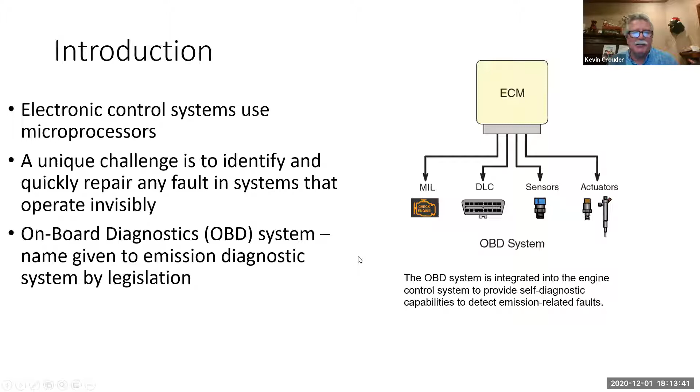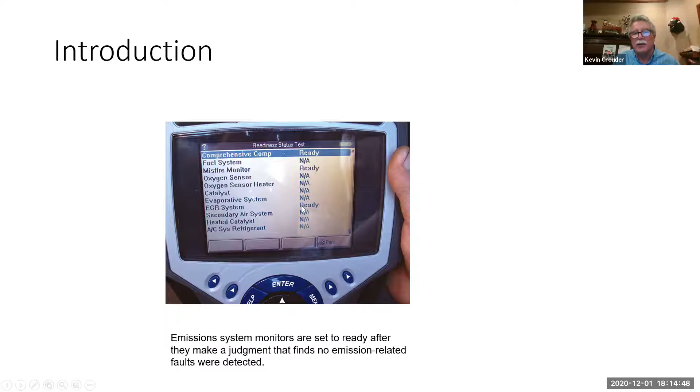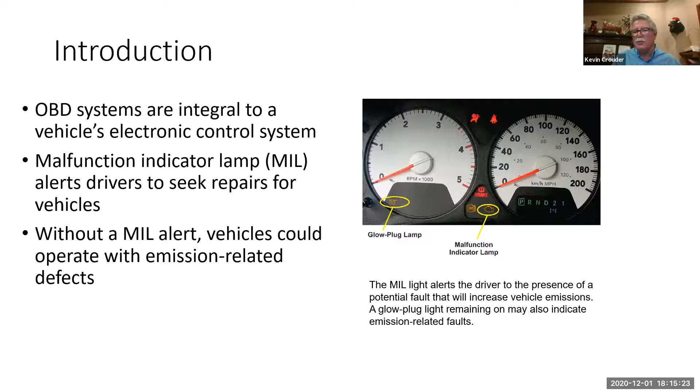So the OBD2 system also is going to do other things. It's going to turn on the MIL light, which is a malfunction indicator light, also known as the check engine light. It could turn on the glow plug light. We'll have wrench lights that come on, a little shape of a wrench, if it's throttle controls or something like that. It's also responsible for turning on and giving us failures for idle only or reduced power, and those kinds of things, depending on, and most of those are going to be related to your after treatment systems.

How these systems work, how all the coding systems are going to work: you're driving down the road, and a sensor is out of tolerance somewhere along the line. The first time it's found, it's going to set what they call a pending code. It'll be secret to the driver, the driver will not know it's happening, and he may notice the car running different or may not. Then the second time he goes out and drives the car, on the very next drive cycle, if it happens again, it'll set that as a continuous code in the computer. It's going to set a check engine light, so the operator knows he has a problem. But if he continues to drive it and has 3 consecutive drive cycles and it doesn't happen again, it'll turn the check engine light off, but the code will stay in the computer. But if he continues to drive it and it never has another failure again, after about 40 drive cycles, the code will be erased from the computer. So that's not all completely in concrete.

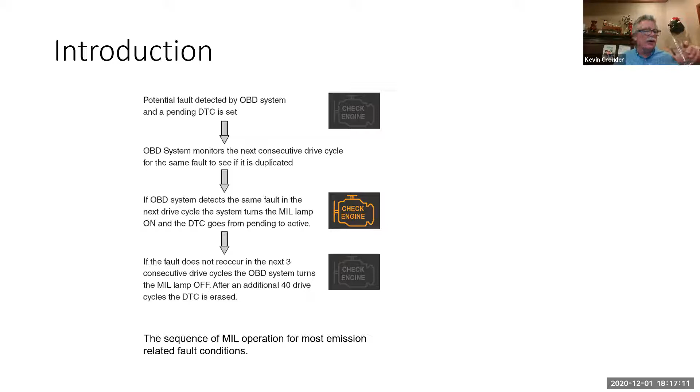That series of events, there's different codes that are failures that maybe a type A, that's really important, and the first occurrence may turn the check engine light on. So there's variations to that, but that's generally what takes place in a computer when we're going to have some kind of a failure. So, and I kind of alluded to this, well, maybe I didn't.

So there's 2 approaches that you're going to make anytime you're going to diagnose any car today. You've got a symptom-based approach, or you're going to go an OBD2 based approach.

A symptom-based approach is going to be, go back to the example of the fuel injector. If you had a simple car that the injector wasn't working and it had a misfire, and you went after this car, didn't go into the computer system, or you went back to an old carbureted vehicle or something like that.

And just a point of reference, 2 days ago, I had to work on a 1986 6.9 liter diesel I haven't seen in 20 years. It's like, oh my gosh, no computer on it, no nothing. I had to go back and diagnose by symptom.

The car ran rough. I had to go and diagnose by the symptom. The symptom was X, it ran rough. What are the things that are going to cause it to run rough? You have to diagnose it based on a symptom and use that kind of strategy to go to it.

Well, the OBD system is a system in which it's going to set codes in the computer and stuff like that. And we are going to read those codes and we're going to diagnose them through a series of pinpoint tests to find the root cause of the problem.

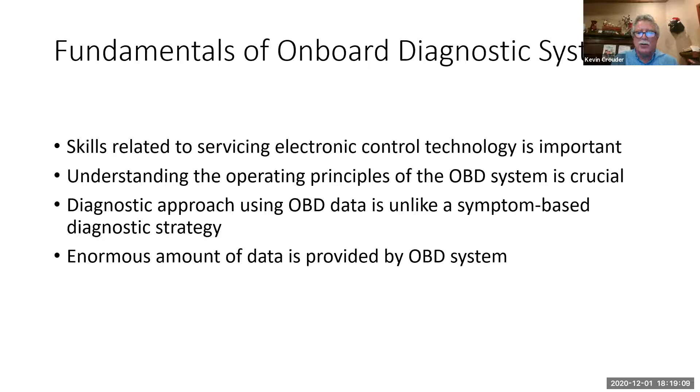I could talk about it all day long, but until you actually experience it, it won't make a lot of sense to you. And here's the kind of that...

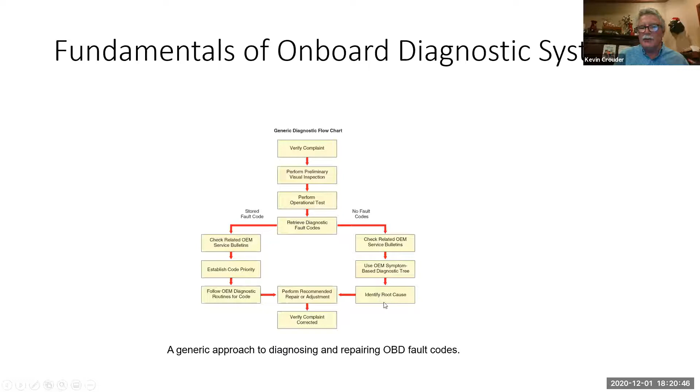So some of the things that the OBD2 system affords us, and there's lots of things that we're going to go through a lot of them, but they give us a lot of real-time data. Whether it's watching PIDs, watching the data that's come across, and we did that a couple of times this semester already.

And then looking at the readiness codes and stuff like that. All this data, we can take freeze frame data, and by having all that real time data, we can then make decisions about what it's going to take to repair these cars.

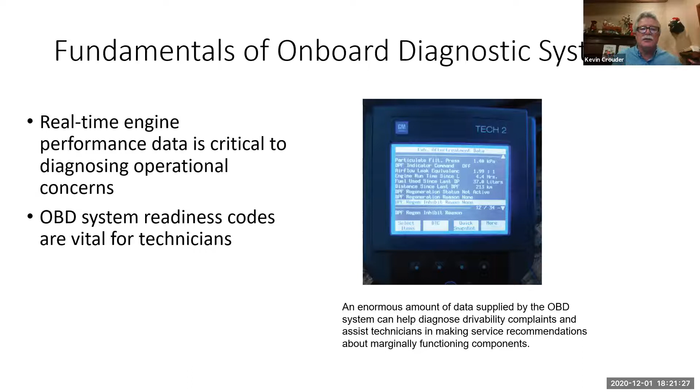And I'm sorry that this has a GM label on it. So after we're done fixing them, we're going to erase the fault codes. We can get it all cleared out, and we're going to go through a drive cycle, which we'll talk about here in a little while, to verify that the repair was successful.

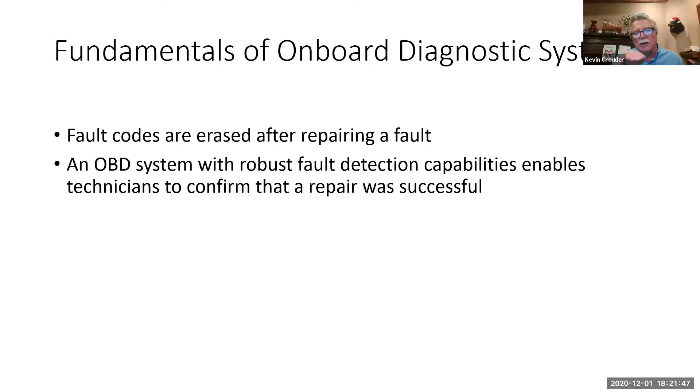Okay, so let's take a step back and talk about the OBD2 requirements for diesel engines. This is the legislation that's put out, and it's not complete, but this is some of the legislation that's put out to say, okay, what is the requirements that diesel engines have to have, whether it's a Chevy, a Ford, a Dodge, a Mercedes, whatever it is.

And gas engines have their list as well, but they must have a malfunction indicator lamp in the driver's view.

If we went back to the early days, back in the early 80s, Ford and Chevy both had computer systems. Chevys turned their check engine light on and they stayed on. If they had a problem, the light stayed on. Ford was a little smarter in the beginning. If the problem was there, the light came on. If the problem was gone, the light went out. It may have stored the code, but the light didn't stay on. Well, they got away with a lot of not having to make a lot of warranty repairs because the light went out, and it wasn't as big a deal as a customer with the light all the way on.

Well, the government figured that out in a hurry and said, no, if there's a problem, it's going to set a code, you're going to turn the check engine light on and leave it on. So it's important that part of the system is that the driver or the operator knows that a check engine light is on, that he has a problem.

There has to be a standardized 16-pin diagnostic connector within the driver's area. Sometimes they're a little out of the driver's area, but they have to be within a certain area of the driver. Not that the driver does anything with it, but it's just so that if you're an independent shop, no matter what manufacturer is going to roll into your store, you can know basically somewhere around the driver's foot area, there's going to be a connector that you can plug into and test, and you don't have to go searching for it. There's standardization of a series of diagnostic fault codes across all manufacturers.

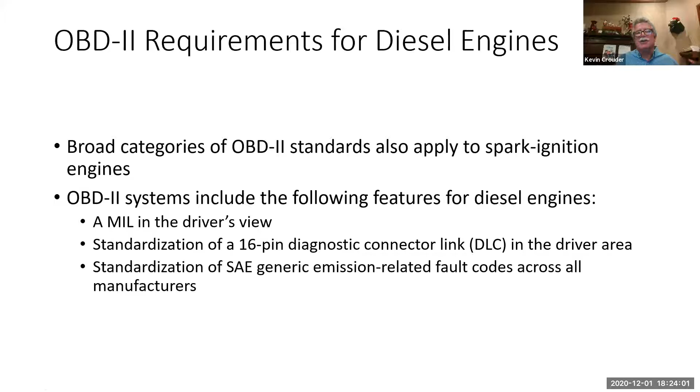We'll cover that here in just a minute. Standardized network communications. In other words, the network talking to the scan tools is all going to be standardized so that you don't have to have 10 different scan tools to talk to 10 different cars. You can buy a Snap-on Solus, or there's some other aftermarket ones you can plug in and talk and get all this data that I can get out of my Ford program off of any vehicle. Now, my Ford program only works on Fords. I can't go to someplace else, but the independent stuff or the generic stuff will work on everything.

They have to be able to display freeze frame data for fault codes, and we'll talk about what freeze frame data is here in a minute.

This is a biggie: standardization of names and abbreviations of components in a system. In the early days, engine coolant temperature sensors were called... what did we used to call them? It's old. Well, anyway, Ford had a name, Chevy had a name, everybody had a name. So nobody knew - you had to guess what somebody was talking about when they said a name, because they were never really simple. But the legislation came out and said engine coolant temperature sensor is going to be an engine coolant temperature sensor no matter who's making it.

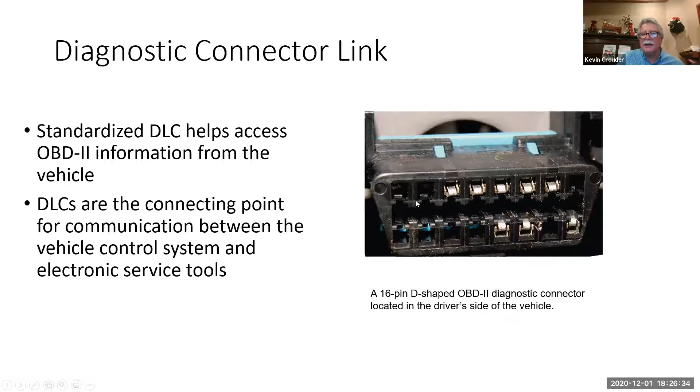So this is the diagnostic data link connector. If you look under the dash of any car built since 1996, and we even introduced it in 1994 on the Mustang, every one of them are going to have this exact same connector in there, and the pin placement on these is going to be the same.

This pin 16 is going to be your power, and I believe the ground - where is the ground? Ground is 5, somewhere up in here. Signal ground, and then 4 is chassis ground. So these are going to be your grounds, and then 6 and 14 are your CAN network, and 11 and 3 are, I think, a low speed CAN.

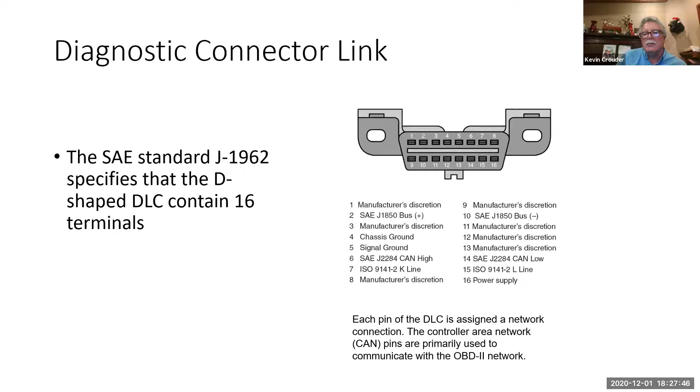Some of the stuff changes through the years, depending on if it's a CAN network or some of the early networks. But at the end of the day, these things all have to be standardized. Now there's some pins that are open that are not standardized by the government, and the manufacturers can put some different signals there. Pins 11, 12, 13, and 8, 3 and 1 are at the manufacturer's discretion. So they leave those so we can put different CAN networks inside those, so we can test them with our scan tool. But this is the connector of choice that you will find under every dashboard.

Some of the early stuff used to have a vehicle speed sensor for the transmission control module, a vehicle speed sensor for the engine module, and so wiring all over the car. Or you had a vehicle speed sensor and it had wires that ran to everything, so you had wires everywhere, miles and miles of wires. Well, that is inefficient, it's heavy, and what we can do is we have this network in here.

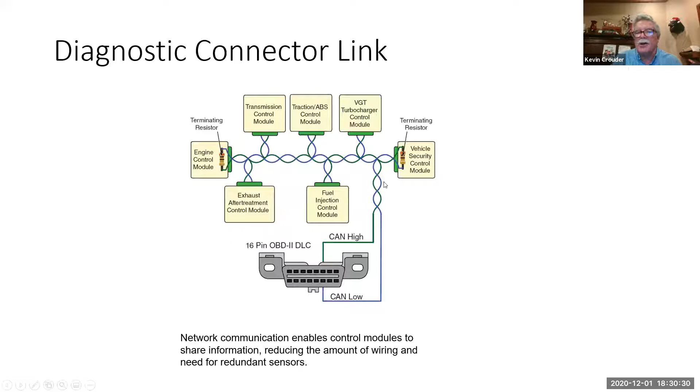And there's lots of them. I mean, some of our hybrids are running 14 or more modules on them, and they're all talking to each other, but they're not all talking on the same network. So you're going to have, say, this particular one is going to be on this network and this network over here. And all these modules might need to share information across network lines, so that we have these what we call a gateway module.

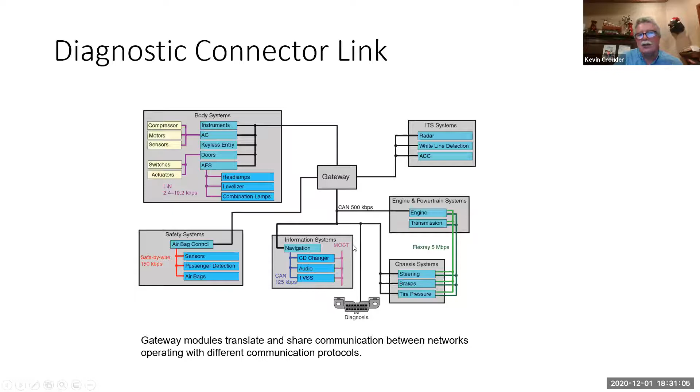So this thing sits in here, and all these modules sharing this information, it can go through the gateway and then share it to another network. So there's all kinds of different networks all over the car, and they're all talking to each other. And that's what all that data link stuff is.

So the new stuff that's out there is called CAN networks, which is controller area network. It's not actually all that new - it's probably darn close to 20 years old now, I guess. But it's the newest stuff, and there's even some faster stuff out there because we have CAN 1, 2, and 3, and lots of different CAN networks out there. But the CAN networks, they're just high speed. There's high speed, medium speed, and low speed CAN networks.

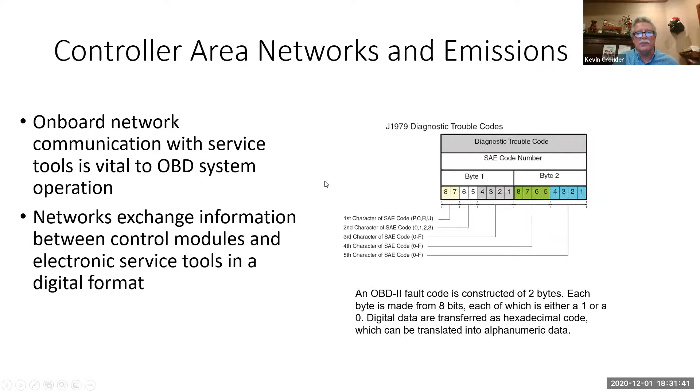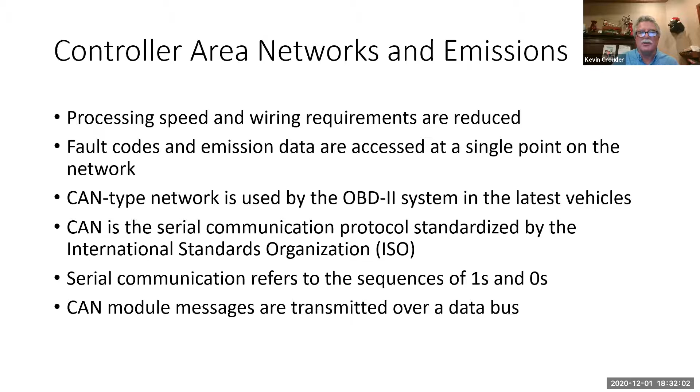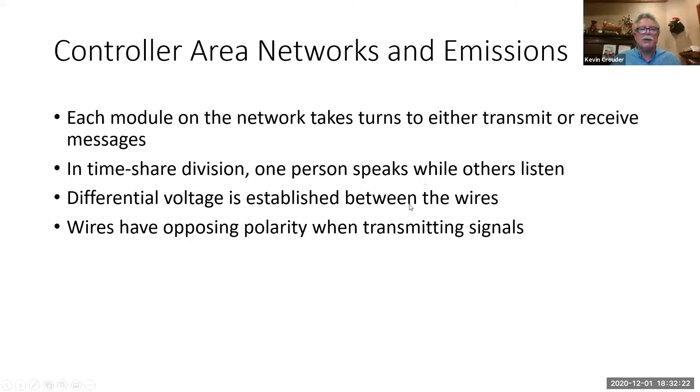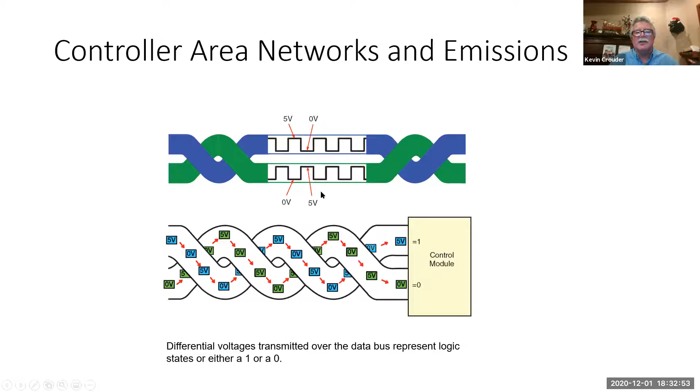Okay, so not all modules are going to be a twisted pair. There's some networks that are just a single wire, but mostly all the CAN networks and all the important stuff is a twisted pair of wires, with one low and one high, and it's going to be alternating. When one's high, one's low. When one's low, one's high. So you're just going to have this alternating voltage back and forth, and you can see this in an oscilloscope.

Okay, and if we're watching a CAN network, we're just tied into that on an oscilloscope. This is what it looks like: a high and a low, and a high and a low. We're not going to get into network diagnostics here, but I want you to know that it's there.

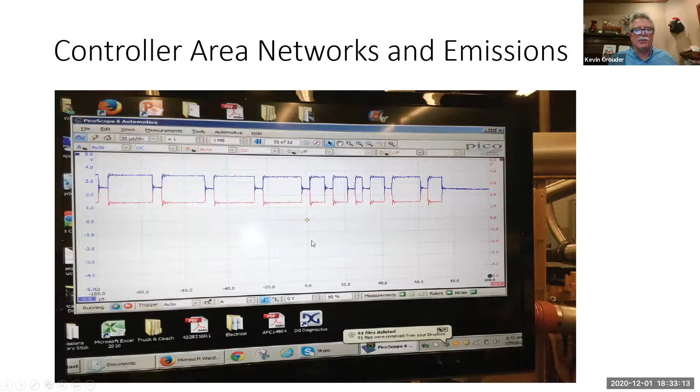Okay, so we're going to shift gears and talk about fault codes. Fault codes are used to bring us down, hopefully, to the closest possible point of the failure. Now, some fault codes are very generic and are only informational. Lots of informational codes out there that just drive you crazy. But most of the codes are trying to get you down to, hey, the problem lies here, go find it here.

And that's where we have standardized codes that are generic and legislated, and then there's diagnostic fault codes that are manufacturer specific, so the manufacturer has the ability to put a whole bunch of codes out there so we can diagnose our cars right to the point of the problem.

So when we pull codes up, has anybody ever pulled codes on a car? Crystal, have we done any of that last semester? No. Okay. Did we talk about this at all last semester at the gas engine class? Yeah, a little bit. Okay, so...

So codes are going to come up, all OBD codes since 1996, in this format. It's going to be a letter with a digit, 4 digits. The digits can be numbers, and then probably in '03 they started introducing letters within those digits, so it kind of gets murky. But the first digit is going to determine the system it's involved with, whether it's B for body, C for chassis, P for powertrain, which includes transmission, or U for network codes.

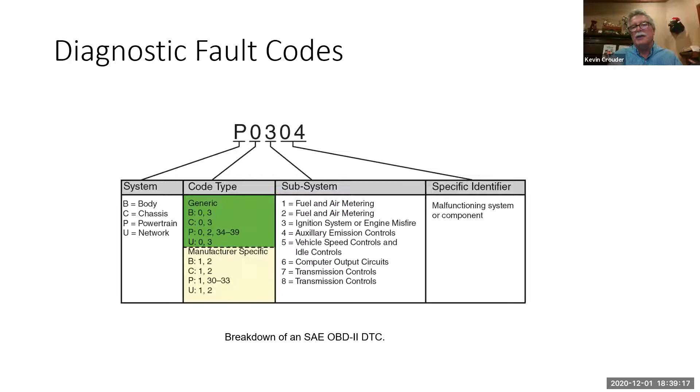But you don't have to memorize this stuff, because once you take the code, you can go into the workshop manual or into the pinpoint test, find the pinpoint test, and it'll walk you right through a series of things to find out what's going on with it.

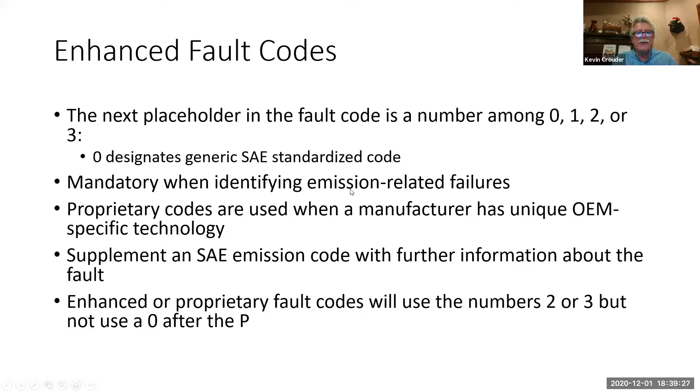So we just covered that. We covered that.

So as we talked about priority codes, we talked about placing priorities on codes. Well, we can do that, but the computer also does the same thing. It sets priorities as well, as far as when it's going to turn a check engine light on and things of that nature. And we'll have type A, B, and C misfires or codes.

A type A misfire or a type A code is a code that says the problem that's happening right now is going to damage a catalytic converter. That's a type A misfire. So if we had raw fuel going into the exhaust on a gas engine because of a misfire - if we have a misfire, we're not burning the gas, so raw gas is going in the tailpipe, it's going to hurt the catalytic converter. That's considered a type A misfire, and that will flash the check engine light and leave the light on first try.

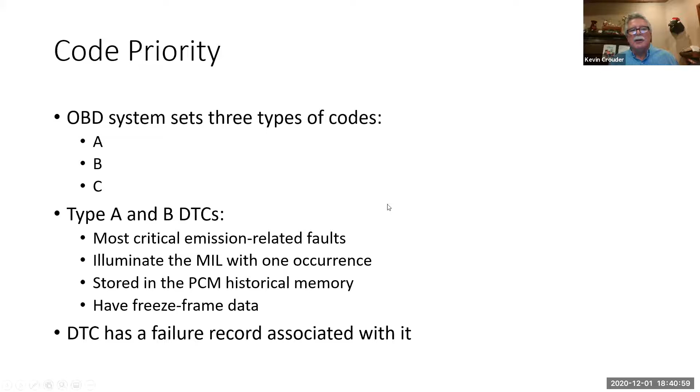It doesn't have to do it on the second cycle. Type Bs are the same thing - they're critical, but not as critical as a type A. And type Cs are not critical at all. Something like intake air temperatures not reading right, or air shutters or something on the shutter controls not working right - something really minor that's not going to cause a bunch of emission problems would be considered type C.

Would an exhaust leak be considered a type C? Well, it would all depend on how it picked up the exhaust leak. The exhaust leak - it's not going to be a code that's going to come and say, hey, you have an exhaust leak.

What you're going to find is a code that says - and now keep in mind this is depending on where the exhaust leak is - but we have problems. You'll have problems on some of these where the cat monitor sits on the backside of the cat, and maybe there's a flange on the back that goes to the exhaust. Well, if that flange leaks right there, as the exhaust comes in, it can swirl fresh air in there. So now all of a sudden that cat monitor's seeing fresh air, and it gives weird sets of codes.

It could see that as, hey, the cat monitor's not working quite right, but it's not a big deal. Or it could see it as, hey, I got air coming through this thing that I shouldn't have, and I've got a potential cat failure. So depending on where that exhaust leak is, your computer's going to pick it up in a performance sense instead of as a circuit fault - it's going to be something's not performing quite right. And based on how it picks it up, it's going to decide whether it's a type B or a type C.

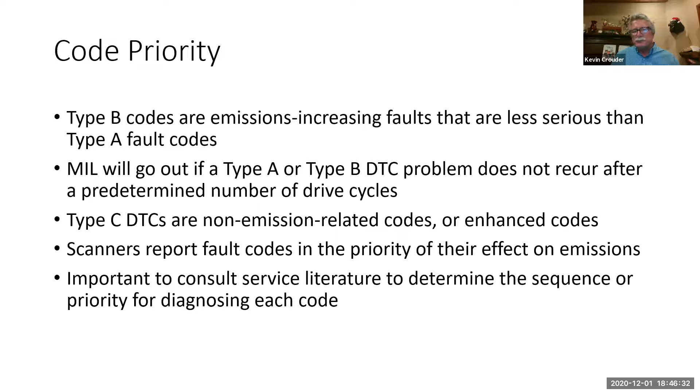All right, so let's talk about what freeze frame data is. Freeze frame data is part of OBD2. Legislation says that the vehicles have to capture data when a fault occurred. So we're driving down the road and a fault happened. Some faults may be a wire went open, or something may be that my NOx sensor went out of spec for more than 15 seconds. Boom, we're going to set freeze frame data when it sets that code.

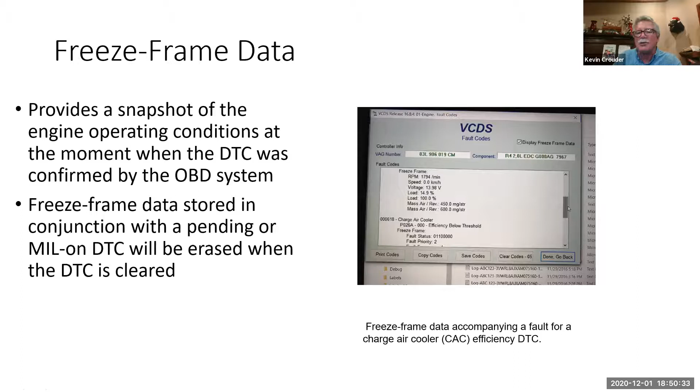That's why we use freeze frame data. Again, freeze frame data is not to capture the data of what was wrong with that part. A couple of rare exceptions might be exhaust temperature sensors -- if you had a big failure on an exhaust temperature sensor, it may show you that sensor was the problem, that it was way out of whack or something like that, but generally not.

So some of the strategies of how OBD2 works: inside the computer, there's going to be a voltage reference set across a signal, and it's actually going to look for a voltage drop across the sensor. It's called comprehensive monitoring, and it's going to monitor all the critical hardwire systems in the car, looking for voltage drops across these sensors.

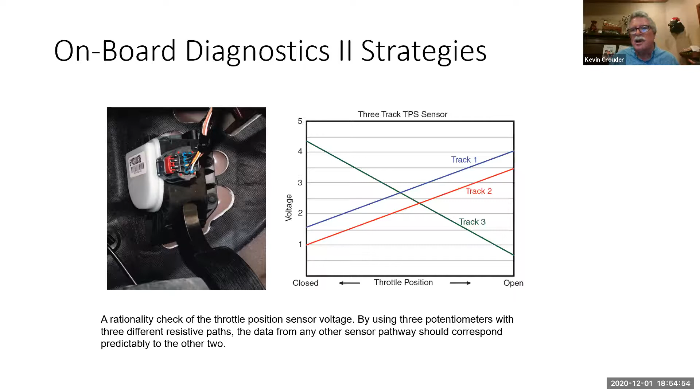Okay, so let's shift gears here and talk about the monitors that are in the system and the readiness status of them.

So there's a series of, like we talked about, up to 14 different monitors in the vehicle. Depending on the monitor, some of them are what we call continuous monitors, they're going to run all the time. The ones checking circuits and stuff like that are going to run constantly. The misfire monitor is going to run as quickly as possible so we can determine whether this thing's got any misfires on it. Others might have to go through a whole rigmarole in order to try to monitor its system.

But what these monitors are here to do is just that, they're monitoring the system to find out how the system is operating. And then it's going to either report a pass, a fail, or a have-not-run-yet. This is part of, if you ever try to get your car smogged and you had a repair or something, they're going to say, hey, your monitors aren't clear, you got to drive the car to get it to clear its monitors.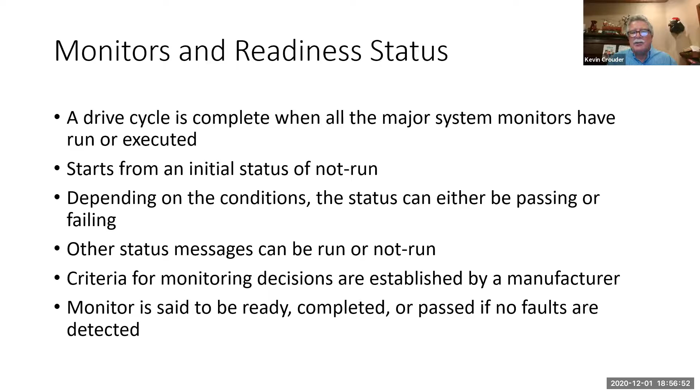It's going to go through a series of tests depending on what test it is. Let me just give you an example. I actually have a slide at the very end with a video that I made today of a monitor check to check the condition of the NOx sensor, to make sure that the rationality of that sensor is correct.

What it does is, you're driving down the road, once per drive cycle, when you come to a stop with the car in gear at an idle, it's going to turn the EGR valve off and watch the NOx levels go up, because remember, when we turn off the EGR valve, the engine's going to create NOx. If we see that rise like it should, then it's going to set the numbers and say, hey, it's good, and that monitor clears. If it shuts the EGR valve off and the NOx reading doesn't go up, it's going to flag it as a bad sensor.

But when we get to that slide, I'll explain a little bit more about what it can be. So we have to look at things kind of logically.

However, all these sensor monitors are going to do different things. Some of them are going to actually turn a valve off and see what happens. Other ones, if all the parameters are set, the things at the right temperature, you're at the right road speed, and everything's perfect, it's going to look at a sensor and say, okay, is everything reading properly? Boom, it's going to work. Different monitors are going to do different things to run themselves.

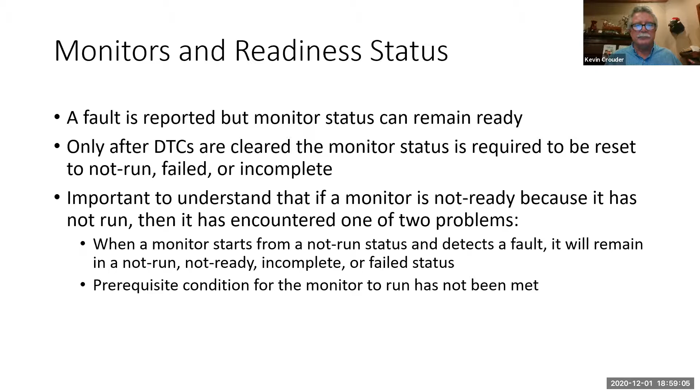And like I said, they're strictly a monitoring system to make sure the car is working properly. So let me make sure I'm covering everything here.

Okay, like I said, there's 14 major systems required by the EPA to diagnose these diesel engines. So we're just going to cover a few of them and what they are going to do.

Fuel system monitor, it's going to evaluate fuel injection pressures, the quantity that's going in. Remember I said if we have a plugged injector and we are making adjustments, and all of a sudden it's like, hey, I'm out of spec on this thing. It's like, okay, multiple fuel event performance.

This week I have a transit in there that actually set a code that says it can't enable the pilot injection. Remember when we were talking about common rail injection, pilot injection was when it would fire an injector before the main injection, so that it would start the flame propagation across the top of the piston, so that when they put the main injection in there, you wouldn't get that cracking noise.

The computer could actually tell me that, hey, I can't enable that system. So it's like, okay, great. But it has a monitor to be able to monitor that. It monitors its timing. It monitors its closed loop feedback controls. Okay, so that's what it's doing with the fuel system.

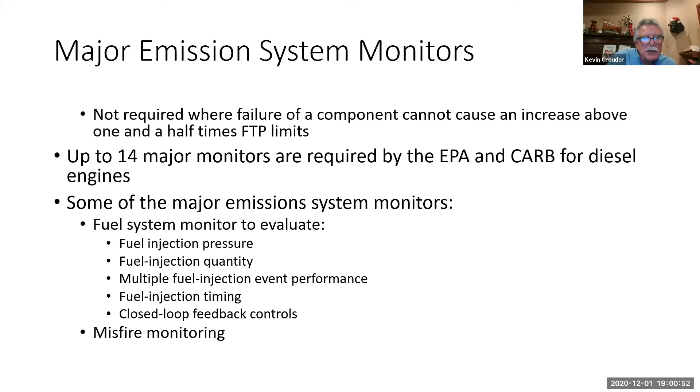They got the misfire monitoring. What happened to misfire monitoring? Well, we monitor misfiring. I don't know what happened to my slide.

EGR, we're going to measure the rate of flow, response rate, whether it's being cooled properly. When we open up, when we hit the bypass valve, are we going to send the EGR through the cooler? Is it cooling it down properly? Is the cooler actually working? Remember in that freeze frame picture, we said that there was a code, P026A, that same cooling system that cools the charge air cooler system is also cooling the EGR. So is it all working? Are all the feedback controls working? So we're monitoring these things to see how it works.

Boost control the same way. Is it got an overboost or an underboost? Wastegate operation, is the turbocharger responding quickly? Is the charge air undercooling? That's what that other code was, that P026A.

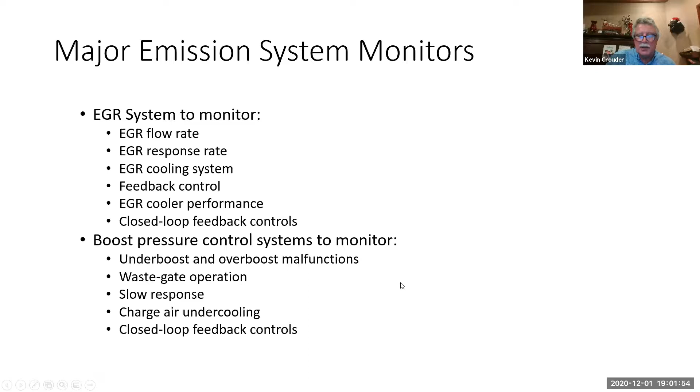Cold start emissions, we monitor the glow plugs. Some of these things have a heater in the intake air, but we don't use those. But are the glow plug systems working?

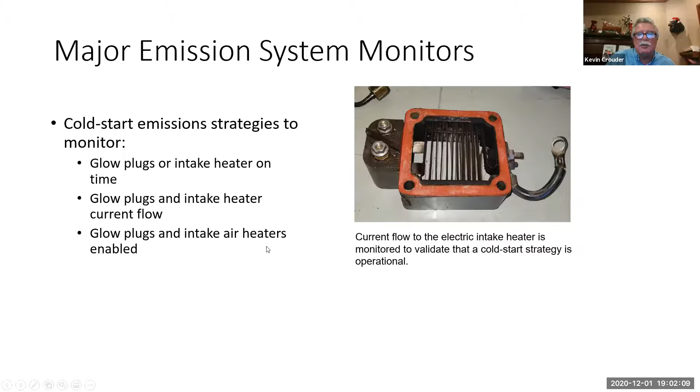We check engine cooling system, crankcase ventilation systems, comprehensive component. That's monitoring all of the input and output signals, make sure all the wiring is good on everything.

We measure the aftertreatments for NOx, make sure the oxidation catalyst is working, make sure that, remember we have the particulate matter traps, the sensors in there to make sure that we don't have particulate matter going out the tailpipe, and we want to make sure we don't have NOx going out the tailpipe. So we're monitoring all of those things.

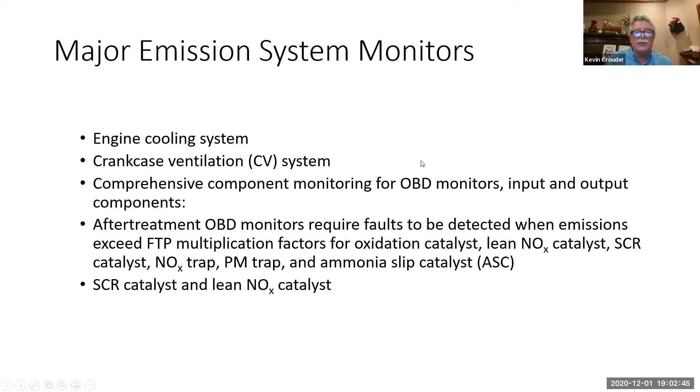We monitor the DPF system. If we're having to regen the thing too much, if it's plugging up constantly, we know we've got a problem with that thing. We monitor to make sure it's gone through completion, make sure that it's going all the way through cleaning the exhaust. It's monitoring it with pressures and stuff to make sure that somebody didn't take it out. Because you could just pull it out, or put a straight pipe through there. Okay, and so the system knows if it's missing.

If the engine's cold or something's going on, we set codes that say, hey, we can't make regeneration happen because I can't make the heat across the oxidation catalyst. Remember, we have a sensor before and after the oxidation catalyst. We monitor the temperatures of those things. Once we're hydrocarbon dosing that exhaust, we should see at least a 200-degree rise in temperature across the DOC in order to cook off the DPF. If we don't see that 200-degree rise, well, it flags a code and stops regeneration.

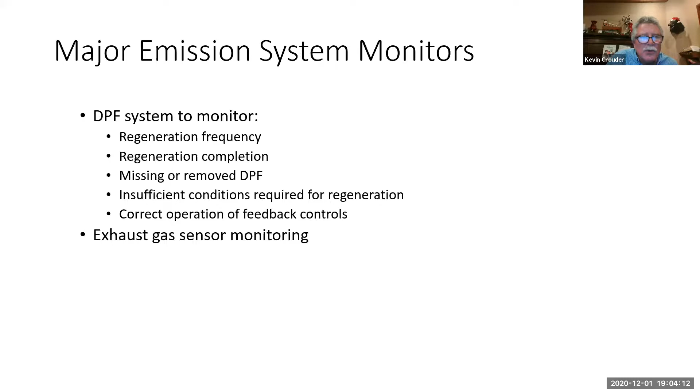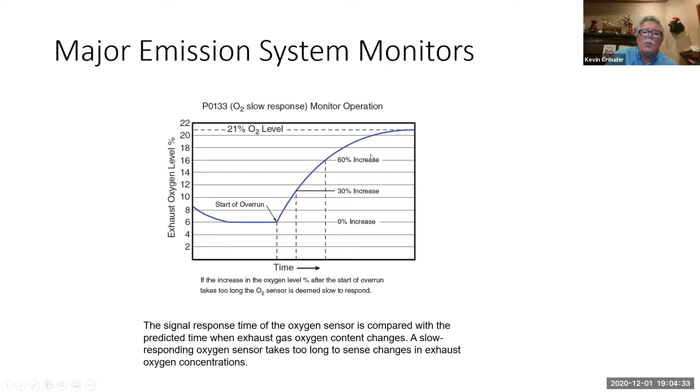I want to show you... where did I go? I'm backwards here. Boom, boom, boom. Let me see if I can make this make sense... I think that one's not going to make sense.

Other tests may be continuous, just constantly monitoring something. If it sees the levels go above a certain point, like NOx when it's monitoring the SCR, driving down the road, and it sees those NOx levels go above for more than 15 seconds, it says boom, I'm going to set a code for you.

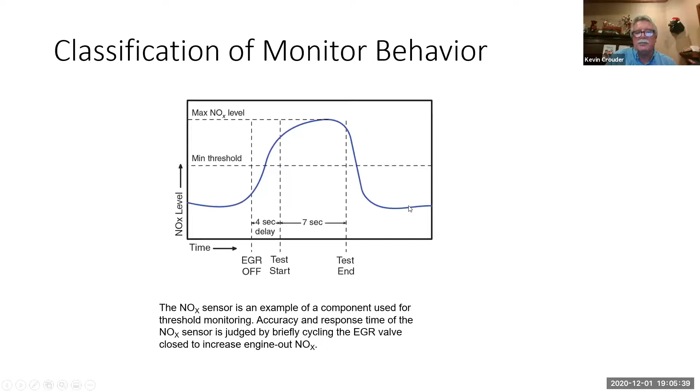So we talked about this a little bit. You have the functionality of things to make sure the systems are actually functioning. We have rationality or plausibility monitoring, which is what we talked about. Is this rational or is it plausible? Is it even plausible that we could have minus 40 degrees and 180 degrees out of two sensors in the same engine? No, it's not rational. It's not even plausible.

Is it plausible for us to have engine coolant at 130 and the oil at 180? Yes, it's plausible. So then it has to make other decisions. I've got a problem - it's plausible, but it may not be likely. So there's a pile of codes out there that'll come into play in that kind of situation.

But it'll also give us codes - let's see some examples - that say, hey, my NOx reading in my tailpipe is higher than the NOx coming into my exhaust. That would mean you're making NOx in the exhaust. That's another thing that's not plausible. So in those situations, it's going to say, hey, there's a rationality or plausibility issue between these two sensors. You've got an issue.

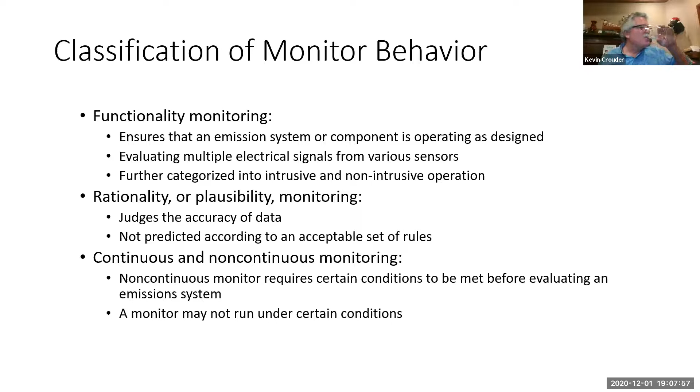So monitoring enabling criteria - this is something that will always be very important to you if you get into this world and start working on these cars. Understanding the criteria that enables the monitors to run is so critical for you. And it's one of the things that frustrates me the most.

Like I told you the other day, I have a truck that's probably got 4,000 miles on it still right now, and it still has not run a particular monitor that we're trying to run in order to clear it, or to know that we have fixed the car. So he's driving around - what happened was he came in with a complaint, we made a repair, and we were unable to verify the repair, but he needed it back, so we gave it back to him. He drove it for near a month and about 4,000 miles, and it came back with a check engine light on with the same code. It's like, okay, well, did something happen in 4,000 miles that it came back with the same code?

So we went in and did some investigating and made yet another repair, and said okay, let's try to clear this thing, let's try to find out, let's try to run this monitor and make sure it's fixed. Well, we've been unable to get that monitor to run, and I've been unable to figure out what the criteria are that enable that thing to run. Something isn't right. There's something likely wrong with the car somewhere that says I want my exhaust temperatures to be here, I want all these things to be in place - whether it's vehicle speed, temperatures, pressures, whatever they are.

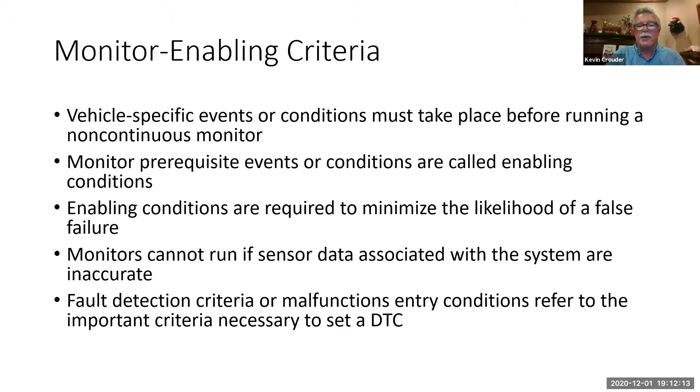Same way with any of those monitors. You've got to find out what it's going to take to run that monitor, and then you can get it to do it. You may want to run and get all the monitors to clear on a vehicle, but really, if a vehicle comes in with a complaint that was associated with a monitor, we really just want to run that monitor. We can clear that monitor, we know that we have fixed the car if it runs a monitor, because if it runs a monitor and still sees a problem, it's going to flag the code and you're going to go fix the car. But if you run the monitor and it says, hey, I passed, call it good.

This is important. Technicians should study OEM service literature when diagnosing the root cause of a DTC.

I could yap at you all day long about all this stuff. At the end of the day, when you are checking a car out and you get a code, read up on the code. What does the code say? It doesn't say, I have a P0304 misfire code, I need to go in and change the plug and the coil and the injector. Because chances are, if you change the plug and the coil and the injector, you're probably going to fix the car. But the reality of it is, it may just be the injector that caused your problem, or it may just be the plug. It's not going to be all 3 things. So that's where you get an understanding of what it is, so you can get to the root cause and fix it right.

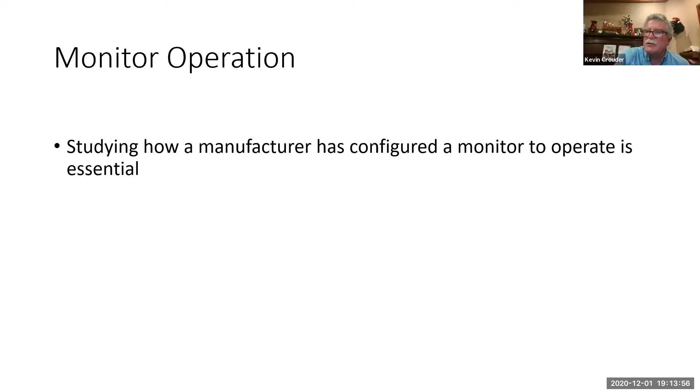Studying how the manufacturer has configured the monitor to operate is essential, and I will challenge you, especially with the diesel things, that it is hard to understand what all it is. Ford actually publishes the stuff that actually comes from the government. It's in our page. In fact, when we're done here, I'll take you there and show you, and I'll take you through a couple of them and show you all the criteria that Ford, or the manufacturer, has to follow from the government to make all this stuff happen. And it's pretty heady stuff.

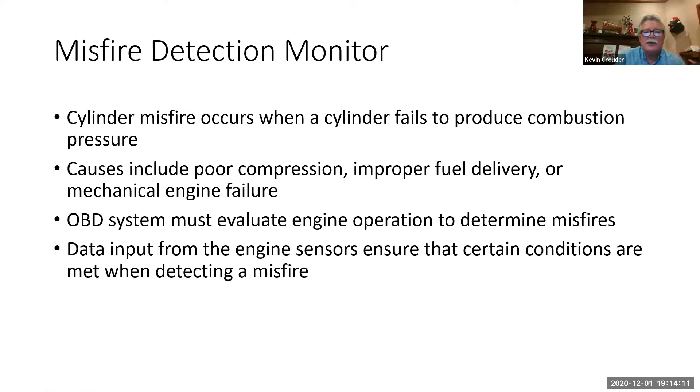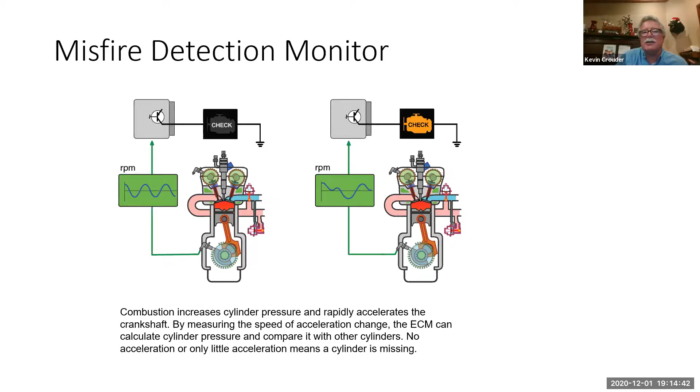Misfire detection monitor, we want to know how it happens. The misfire detection, it's very simple. When an engine misfires, we can sit there and watch the RPM on an oscilloscope. We can watch it really smooth, but as this one here drops, because we now have a misfire, it's going to pick that up. And that's all that misfire monitor is doing, is watching the RPM from cylinder to cylinder to see how that's working. And when it sees multiple events like that, it's going to flag a code. And it's only monitoring the crankshaft position sensor.

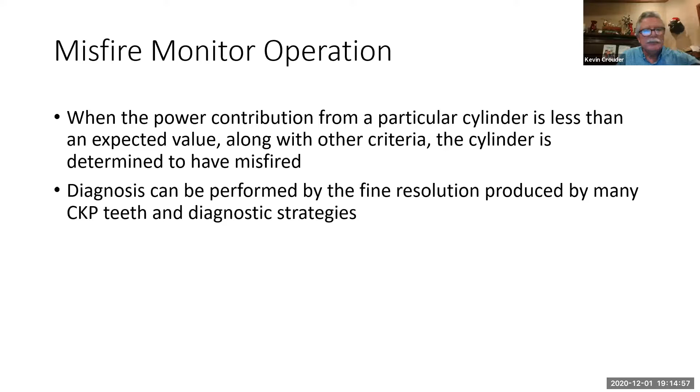I think I covered all this stuff.

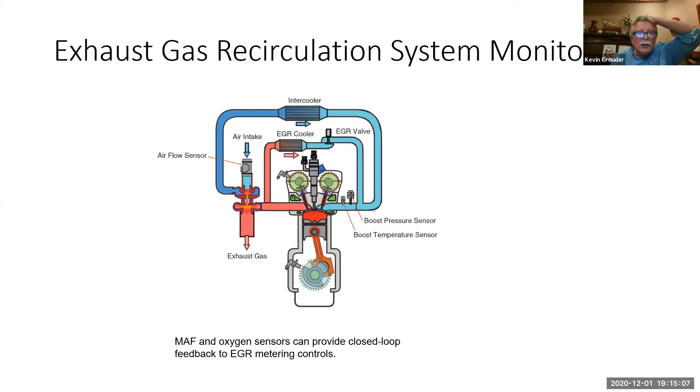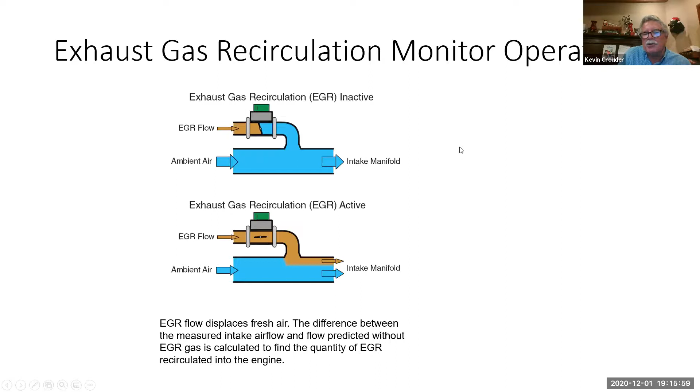The exhaust sensor is only going to, most of the time, monitor the mass airflow sensor if we have exhaust and air coming into the engine. If we open up the EGR, we should see less air coming in if the same amount of air is going into the engine, and we open up the EGR, we should have less air coming in the intake and more air coming in through the EGR. That's going to show up as a drop in the mass airflow sensor. So the mass airflow sensor is going to be our main sensor that tells us whether the EGR is actually working or not. There could be pressure sensors, but usually it's always going to be mass airflow.

We've covered all of this. I'm going to bore you to death here, but I want to show you - I'm going to show you some OBD2 stuff.

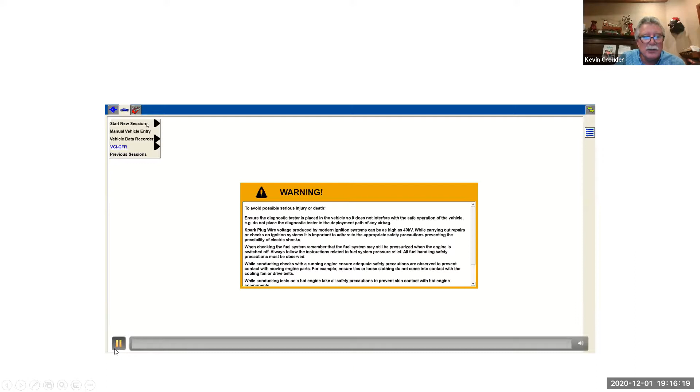Okay, so this is a vehicle. Sorry, I had the radio on for a second. There we go, got rid of the radio. Okay, I'm just booting up on a car here.

So what we're going to look at here, I'm going to get it up and freeze frame it. We're looking at OBD2 results. Let me bring it up here.

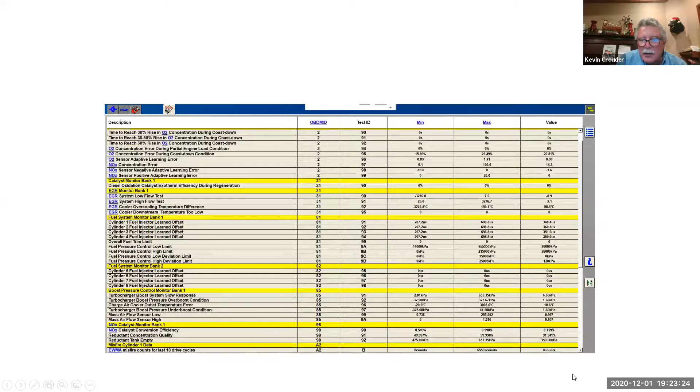I don't think I did anything else to this. Okay, so let me do this. Let me find it. Let me do this, let me do this.

Now why didn't it pick that up? Come on, baby, I'll go here, here, here. Do you see how come I'm not picking up? Oh no, how come you guys see? I'm not, for some reason, I'm not seeing, trying to bring up my Google Chrome here. Come on, do you see Chrome on there? There it is. Oh, you guys probably can't see what I'm looking at, can you?

All right, let's find our canvas here. No, I don't want that. I want canvas anyway, I wanted this. And now I shoot, I'm going the wrong direction here. All right, here we go. I'm going to bring you up another share. Here we go. Oh my.

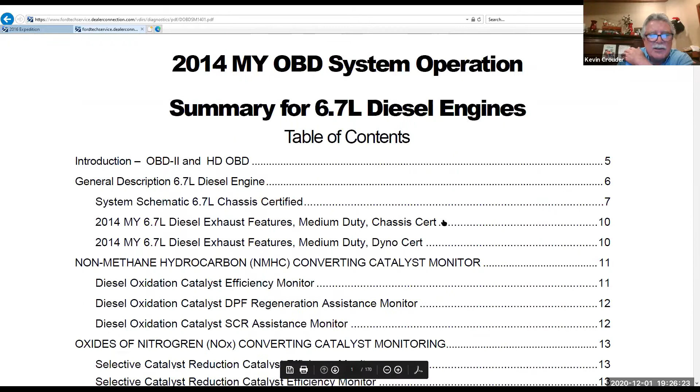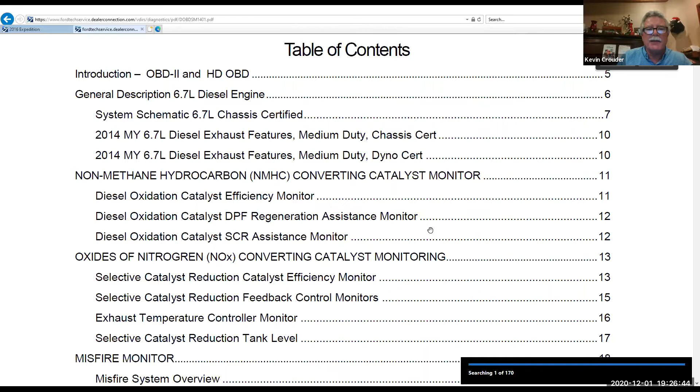All right, so this is all the literature that's out there on this. So we just pick up, let's grab a '14 diesel. And this is all the OBD2 literature that's out there of what's in here. And let's try to find, I think if we do Control F, let's try to find a P207F.

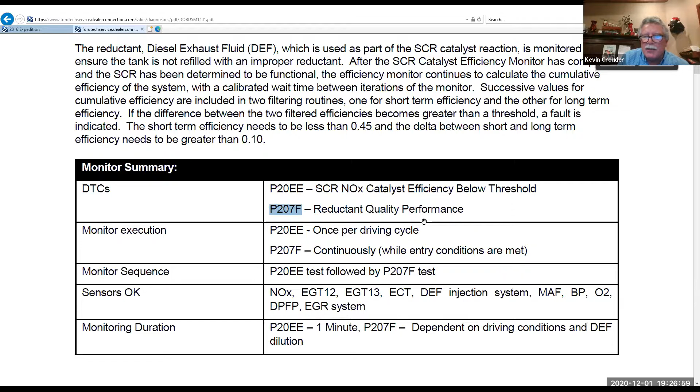Okay, so now we want to find these two codes, two that really beat us up all the time, and you need to try to figure out monitor execution. Okay, P20EE, once per driving cycle. The P207F is continuously. So it's going to tell you how often are these going to test themselves.

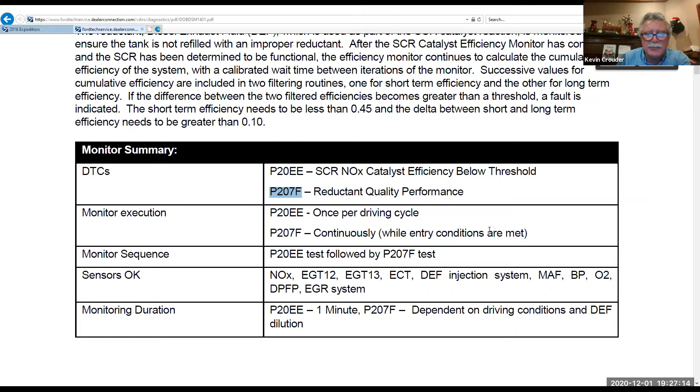Okay, these are the sensors, says okay, NOx, all these sensors here all have to be okay before it's going to run. Well, when we say okay, that's one of the things that frustrates me. I've been trying to chase down a P20EE on a '19, and okay, all these are okay. Well, I look at them and they're okay, but what does okay mean? So is it okay, but is it way out of spec? I don't know.

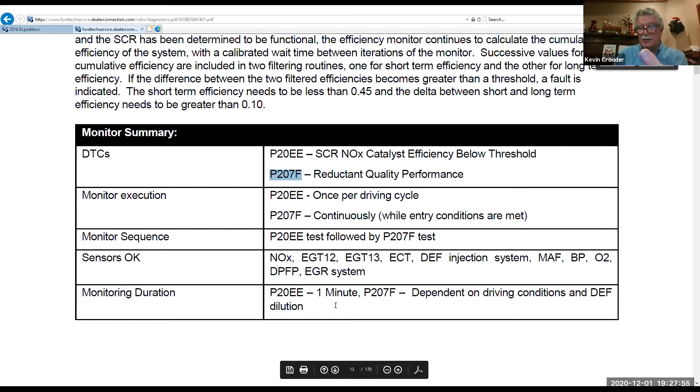But it's going to tell you the duration of it, okay, it's P20EE, it's going to be for one minute. It's going to run this thing. What is the criteria? I don't fully know all the way.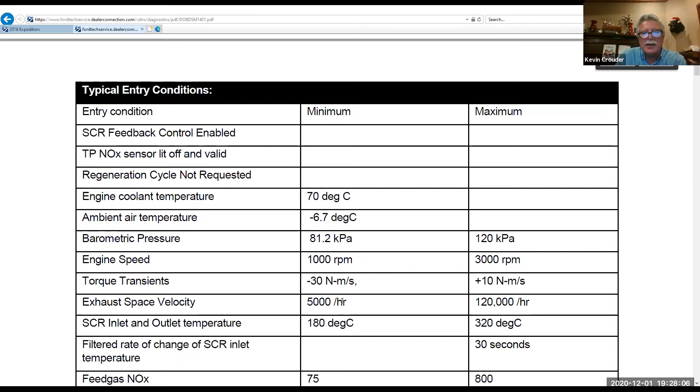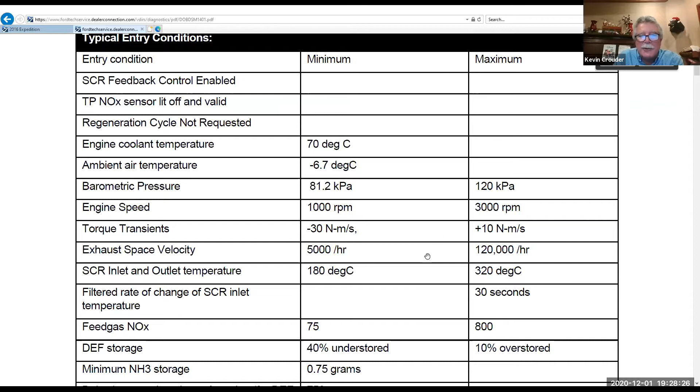But as it goes through, it's going to tell you, it's going to have all this information that it's trying to read when it's reading it. Okay, and I told you that some of the stuff is really heady and you're trying to understand, what's a torque transient, what are all these things? I don't even know, but this is what all that monitoring system does. But anything you ever need to know about, you can go to this book and try to understand it.

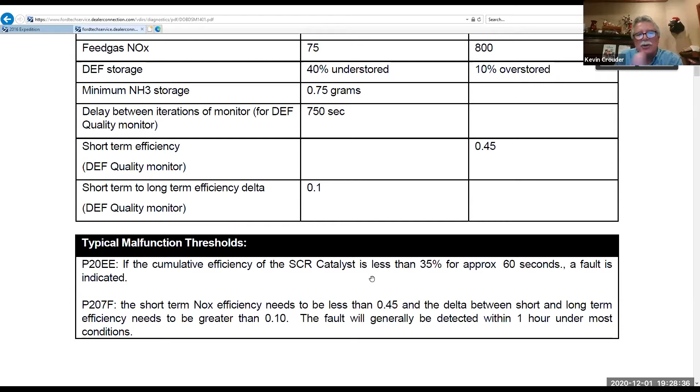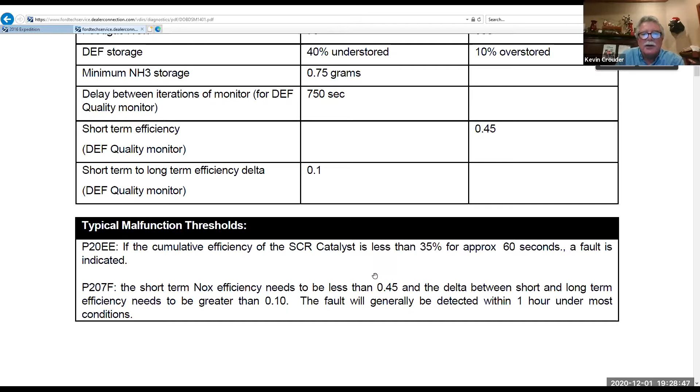Sometimes you've got to read it a couple of times and think, okay, I see what they're trying to say and what they're looking for. The P20EE is looking for how a catalyst is actually reducing the NOx. The P207F on the early system is how they used to measure how good the exhaust fluid was in the system. Rather than testing it now, we test it with an actual sensor. I'm just trying to give you an example of what's happening here.

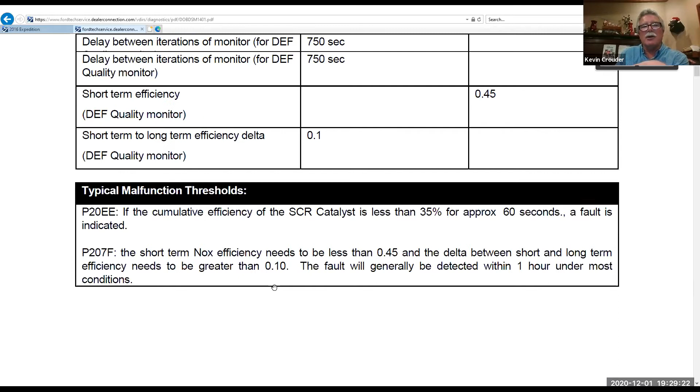You can read through here, this goes into the next one. Every one of these codes and every one of these monitors are in here, and they explain it all to you in this ad nauseum. So it is available for your bathroom reading, to be able to sit and understand and know all this stuff.

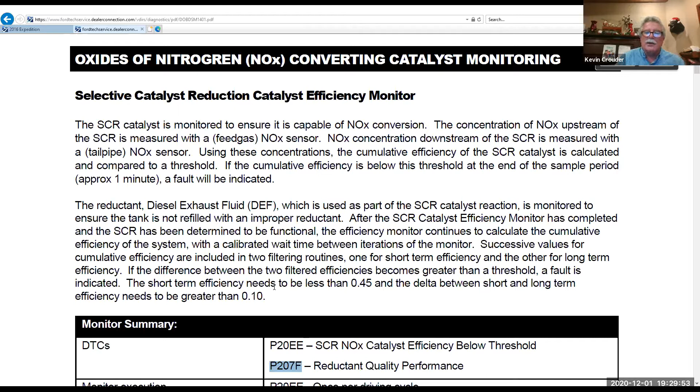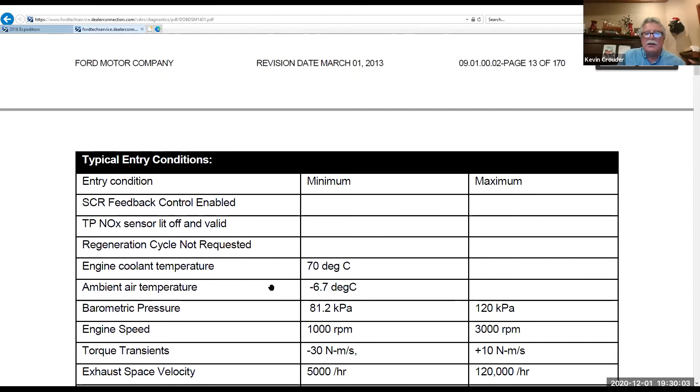But you really only need it when you're faced with a code, especially if it's giving you problems, and you need to go find out what's causing it and what they're looking for. I'll tell you, especially with these two codes, I don't fully understand what they're looking for. It's exceedingly difficult. I got some other information from Ford to find out what we're looking for.

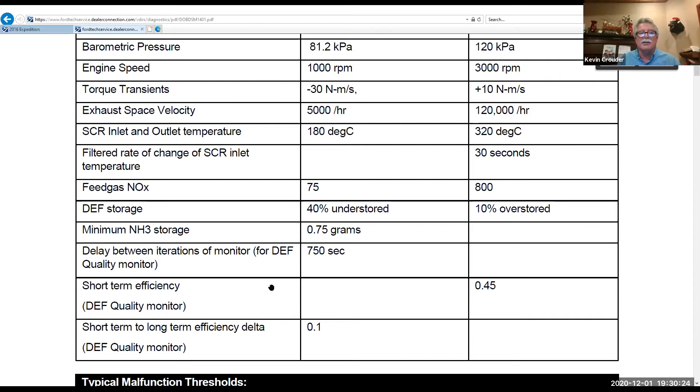At the end of the day, you're looking for no more than 10 parts per million of NOx going out the tailpipe. Well, this vehicle I'm fighting has less than that. I've never had it have more than that. I don't know what I'm chasing. Unfortunately, there's not a lot of people at Ford who know the answer to a lot of this stuff either. Some of it's very difficult and very government driven.

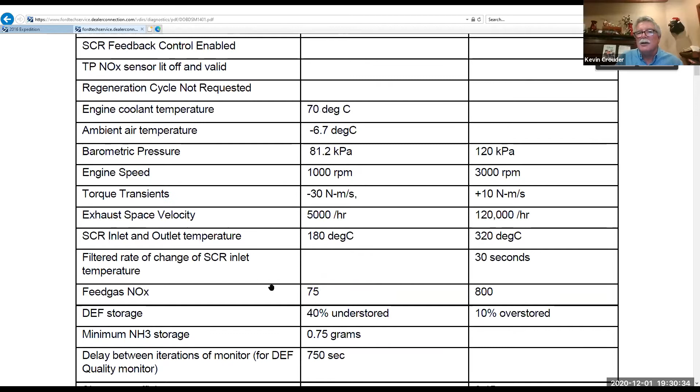If you're having a problem with one, it's very difficult. I don't mean to discourage anybody thinking about getting into this field, but just know that all this stuff is government driven, and its reasoning is for emission control. We're trying to make sure that we're not polluting with these vehicles running around.

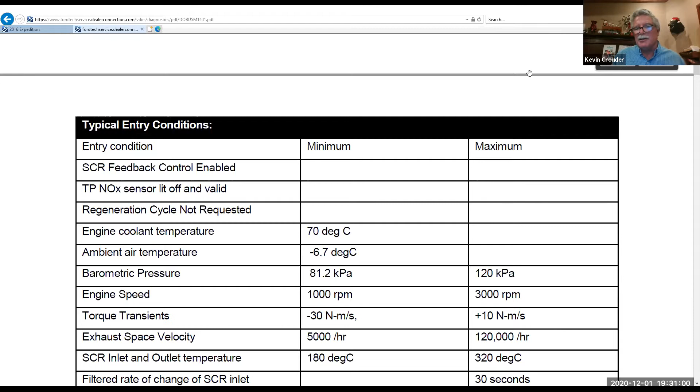So does that make sense, everybody? Did that just throw a big monkey wrench in there, or does this make sense to you? Or do you even care?

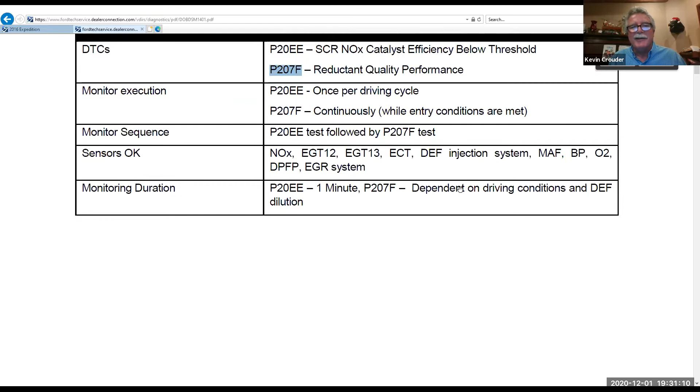It makes sense. Okay, you probably won't run into this kind of stuff in an aircraft that I know of, will you? What do you guys do there? They just want to know how it runs, right? Yeah, how's that going up there?

Are you done yet, or you got another week or two? I have another week, yeah. Are you going to pass the class up there? Yeah. You guys aren't doing in-class anymore, are you? We are doing labs over there. Are they pretty good? Yeah, they're really hands-on. I'm sorry that we don't have any hands-on. Blame your brother.

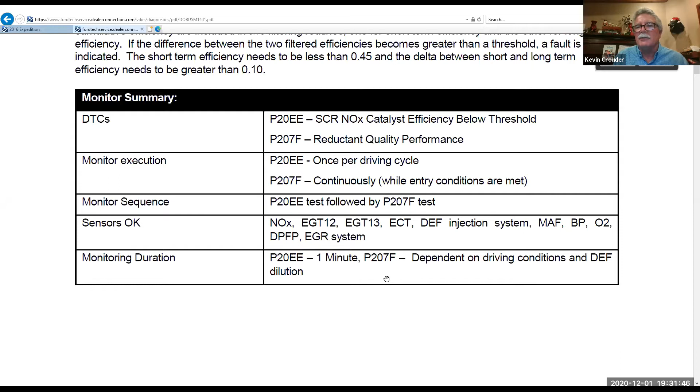He's telling him, hey, you need to start running the show over there and let us in. So anyway...

So that's all I have on OBD2 systems. Does that make sense? They're monitoring systems to make sure that the system's running good at the end of the day, and we can use those to help us make sure that we've repaired the vehicle. Because everything we've talked about, whether the fuel injectors, the glow plugs, the EGR, all the exhaust after-treatments, all of that stuff is monitored by the OBD2 system.

And there you go, that's all I have for you on diesel drivability.